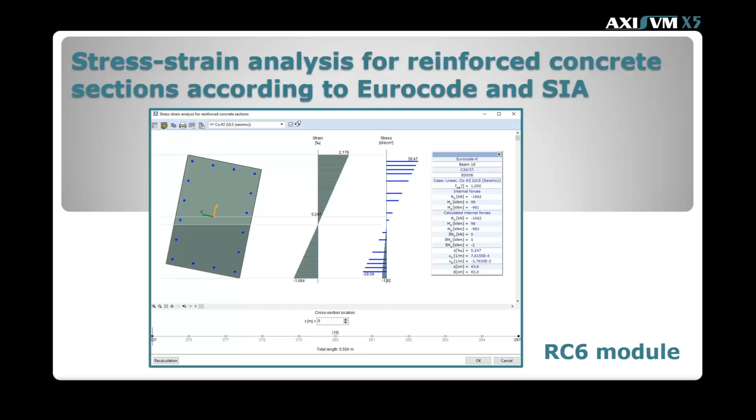It can take into account the applied reinforcement, the nonlinear behavior of the concrete and the rebars, as well as the cracking of concrete. The stress-strain state of the concrete and rebars can be used to verify the structure in various serviceability limit states. The stress ranges can also be calculated with RC6 for fatigue verifications.

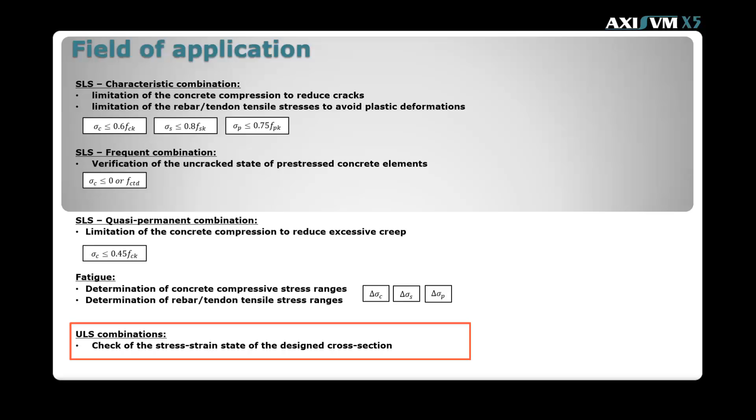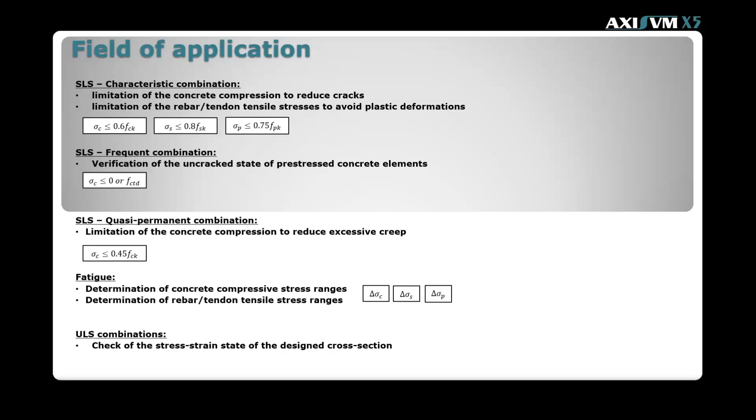Moreover, the module can help to visualize the stress-strain state also in case of ultimate limit state, after the cross-section is designed with the RC2 module. In the next sections, the new features of the RC6 module will be presented through a prefabricated reinforced concrete hull with crane track, using the Eurocode standard.

The one-bay reinforced concrete hull is 20 meter wide, 12 meter high, and 48 meter long. The distance between the main frames is 6 meter. The main beam is a 150 centimeter high pre-stressed T-beam.

The columns have a cross-section of 40 x 40 centimeter and 40 x 80 centimeter, while the dimensions of the rectangular longitudinal beams are 40 x 70 centimeter. The hull is designed with a reinforced concrete crane runway to serve a 10-ton crane. The crane runway girders are also rectangular cross-sections of 40 x 60 cm.

The main beam has a concrete material grade of C40/50, while all other elements are C30/37. The beams are single-span girders. The column bases are clamped.

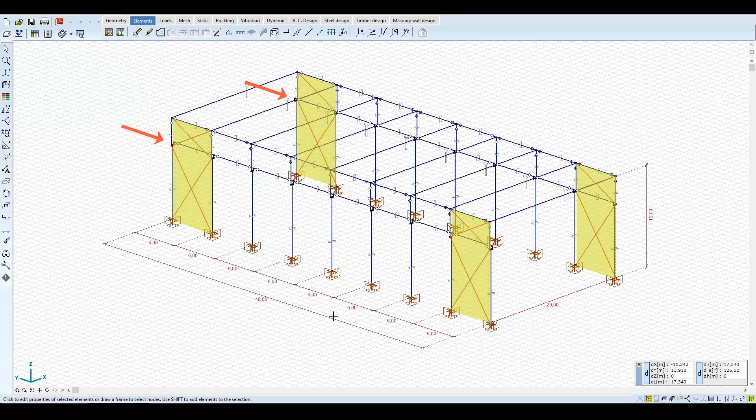Bracing is applied at both the front and rear parts of the hull to transfer the longitudinal wind and crane forces to the fundament. All structural elements are modeled with beam elements except for the bracing, where truss elements are used. The eccentricities are taken into account with rigid links.

Flexural hinges are applied at each end of the beams. In order to be able to apply the pre-stressing properly on the main beam, translational hinges with a small stiffness are used in the global x-axis to avoid force transfer in this direction.

The following load groups and load cases are defined for the analysis and design of the structure. We have permanent loads, such as the weight of the structure, the weight of the wall panels and the roof load. A tensioning load group is defined for the pre-stressing of the main beam, and we have also the typical meteorological loads, the snow load and the wind loads.

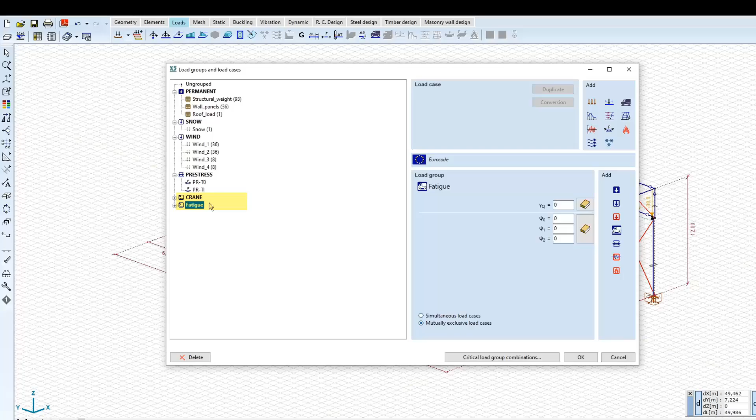Two crane load groups are defined as moving load groups. One is for the ultimate limit state to design the crane runway beam. The other is for the fatigue assessment.

Once we define the load groups and load cases, we have to define the critical load group combinations. In this table, we can choose which load groups can be combined with one another, using the partial and combination factors of each load group, to arrive at the critical results.

In our case, the fatigue load group does not need to be considered for the critical combination. Therefore it can be unchecked.

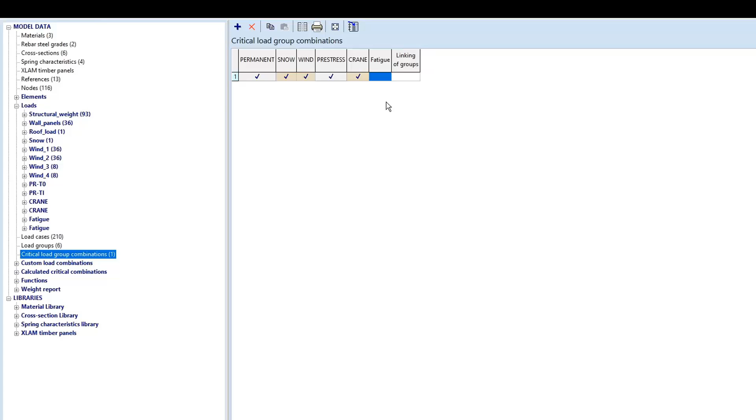In some situations, we need more than one load group for the same action, if it is described with multiple groups of loads. Such case is the crane load itself, where Eurocode, for example, defines 10 loading situations. For the sake of simplicity of this example, we consider only the first load group, which is authoritative for the design of the crane runway beam.

However, the final design should contain all 10 load groups, and in the critical load group combinations table the simultaneous action of them has to be excluded.

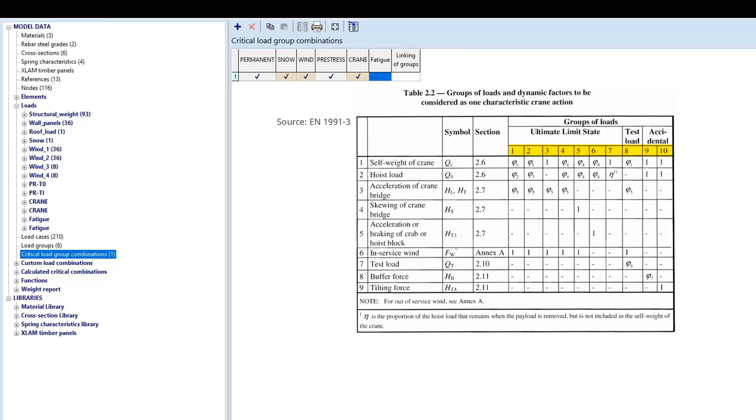Now let's see how we apply the different loads on the structure. The structural weight is calculated automatically by the software. The weight of the wall panels is applied as line loads along the length of the columns.

For the roof load and for the snow load, a load panel is defined to automatically distribute the surface loads onto the main beams. The roof load is 1.0 kN per square meter, while the snow load is also 1.0 kN per square meter.

We can also ask the program to show the load distribution scheme as well as the derived line loads on the main beams. This way we can check if the distribution corresponds to that of our expectations.

At the wind load definition, we chose the traditional way of distributing the loads as line loads onto the columns. As a simplification, only the columns are loaded. Furthermore, the wind pressure and wind suction are indifferent from the wind direction.

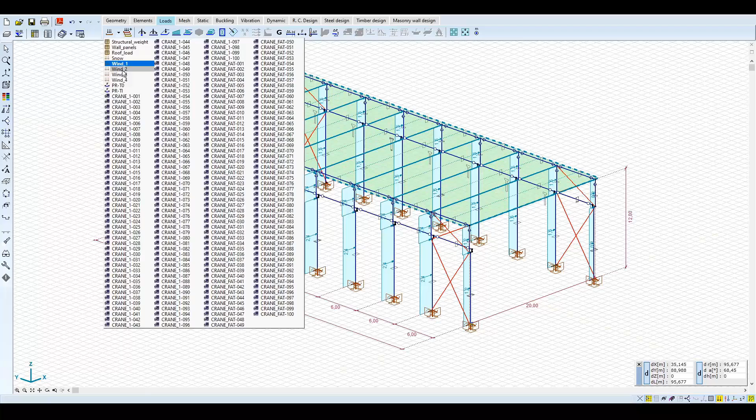All four wind directions are simulated with a wind pressure of 0.4 kN per square meter and a wind suction of 0.25 kN per square meter.

The pre-stressing is modeled only for one beam, which is authoritative in the middle of the hall. The pre-stressing is applied with the help of the PT1 module. This module is designed for post-tensioning applications, but it can help us to define the pre-stressing tendons and to automatically calculate the external forces caused by the pre-stressing.

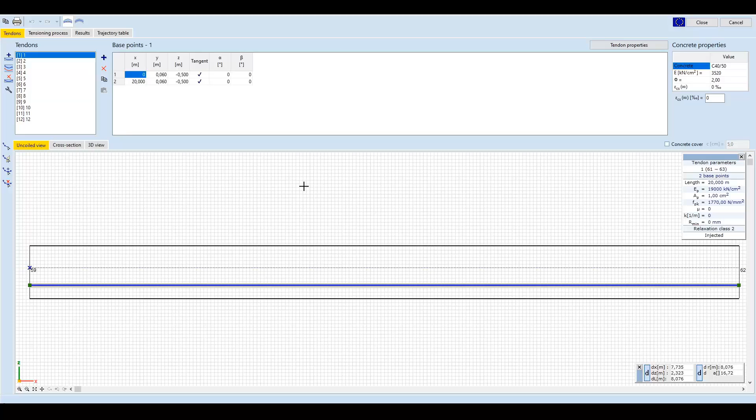In the PT1 module, we can easily define the position of the tendons using the longitudinal or cross-section view in case of the graphical input, or by using the tabulated input option. In this example, we apply 12 pieces of FP100 per 1770 tendons.

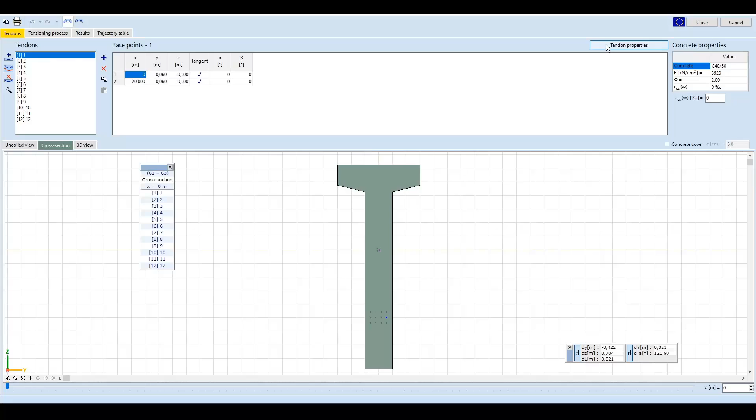In case of pre-stressing, the tension loss at the end of the tensioning process is nearly zero. This behavior can be obtained by setting the relevant tendon properties to 0. At the tensioning process, we leave out the anchoring loss and we apply a 75% tensioning from both sides.

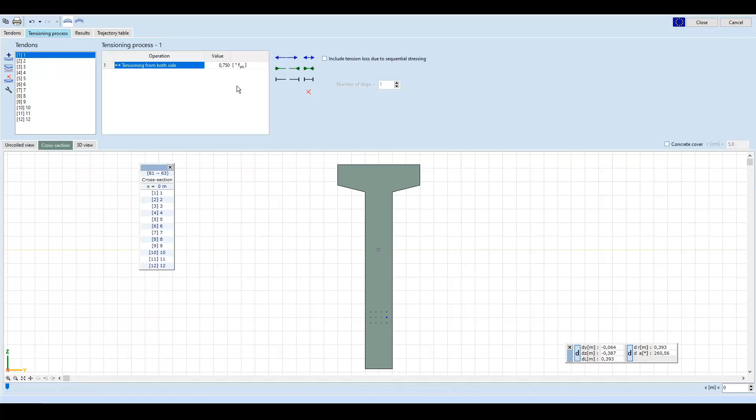We can check the results on the Results tab. The tension force is constant without additional loss along the beam. And as we can see, there is no additional vertical internal force, since the tendon is straight.

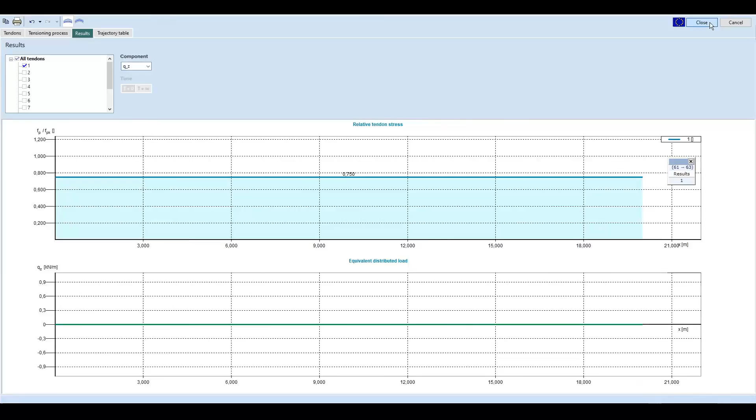If we go back to the model, we can see the external forces at both ends of the beam. The normal force represents the tensioning force at the time of pre-stressing, and the bending moment is caused by the eccentricity of the tendons. The PT1 module calculates the tension loss during the lifetime of the structure, but since this

loss is related to a post-tensioning process, it cannot be used in our example. The loss in pre-tensioning is only estimated and a factor is used to convert the T0 results to the T infinity time step.

Let's move on to the crane load definition. Typically, overhead traveling cranes have a hoisting class of HC3 or HC4 and an S class of S6 or S7 for fatigue verifications.

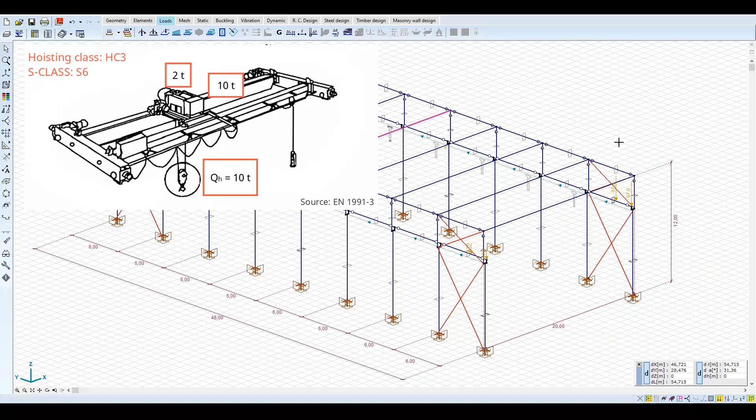In our example, the hoist load is 10 ton, as well as the weight of the crane. And we have a single 2-ton crab. Considering a hoisting class of HC3, and an S class of S6, leads to 195 kN characteristic load on one side, and 85 kN on the other.

The crane has 4 wheels with a distance of 2 meters. The crane load is applied with the help of the moving line load definition. The wheel loads are concentrated loads, but we could apply distributed loads as well.

We can define the type, eccentricity and the longitudinal position of the load. To simplify the example, we will only use vertical loads, but the other simultaneous horizontal Fx and Fy components could be defined as well.

The position of the second wheel is 2 meters. The crane cannot leave the crane runway beam, so we use the crane runway mode. It is sufficient to use a one-way pattern, since the wheel loads are identical on one side.

In the next step, we define a load path by selecting the relevant crane runway beams and also the start and end point of the path.

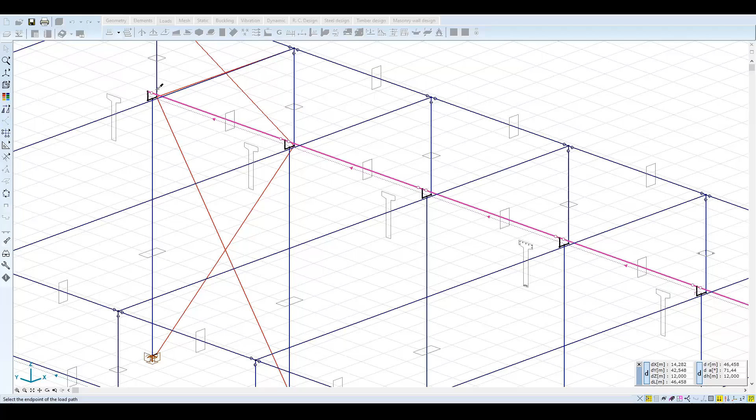We need a smooth load distribution. So we set the number of divisions to 100. The software automatically creates 100 load cases for the crane load in the 100 different positions.

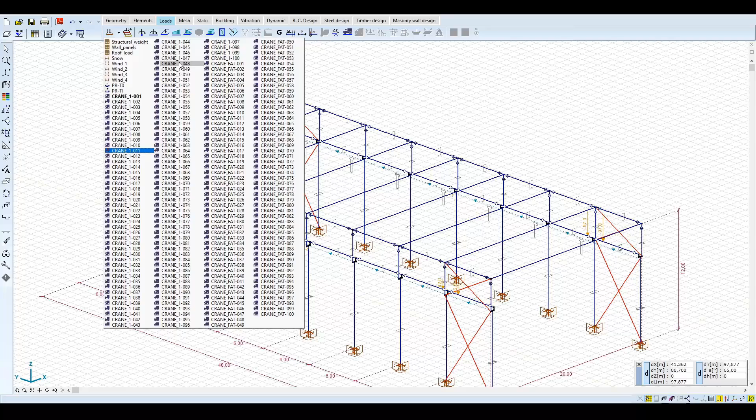For the fatigue verification, a reduced wheel load of 88 kN and 37 kN is used. We define the fatigue crane loads in the same way as we did for the characteristic load.

We can change the parameters of the moving load anytime. For example, the number of divisions. And the software redefines the load cases automatically.

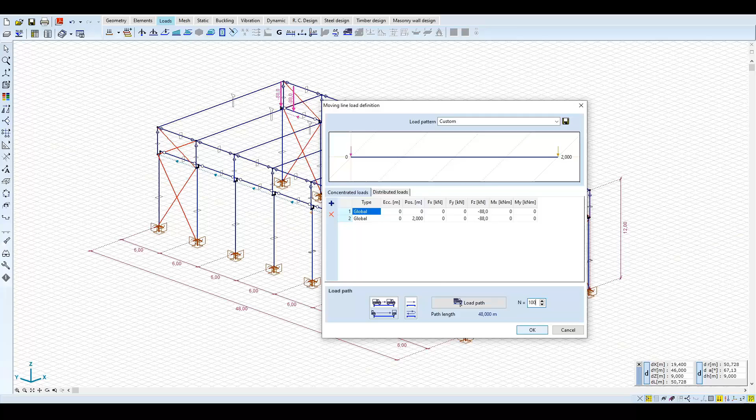In addition to the automatically calculated critical combinations, we can also define custom combinations for various purposes. For example, we would like to check the uncracked state of the main beam in the frequent combination at the time of pre-stressing as well as at the end of the lifetime. The loss in pre-tensioning is estimated to be about 30%, so a factor of 0.7 is used for the T1 time step.

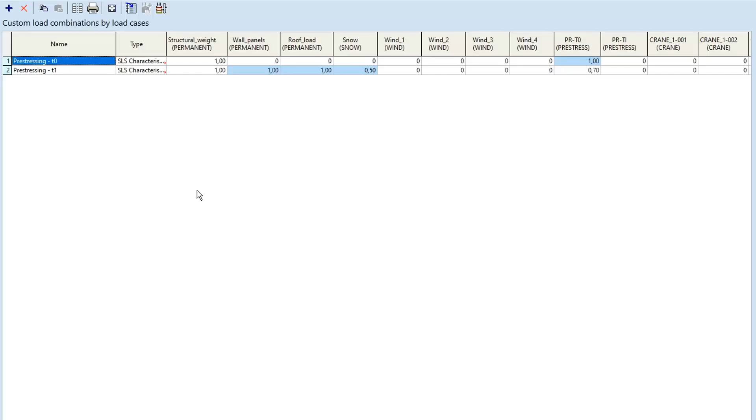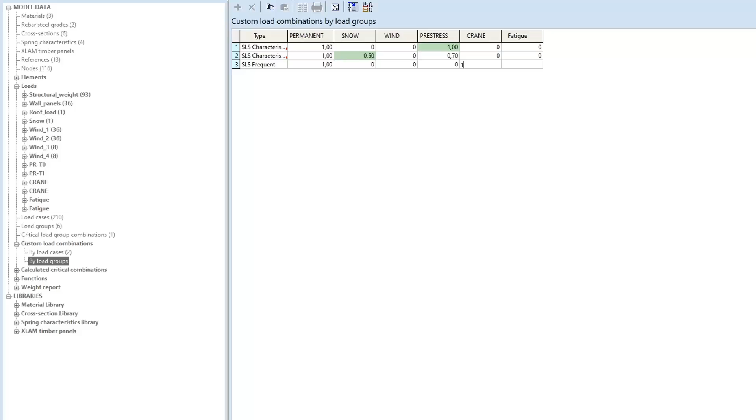The crane fatigue load is a unique load group. For fatigue verifications, we have to combine the moving load with the permanent loads. This can be done in the custom load combinations by load groups table. It is sufficient to define which load groups are combined with one another, and the software generates all the possible unique load combinations, so we do not have to do it by hand.

After the definition of the load combinations, we can start the static calculation.

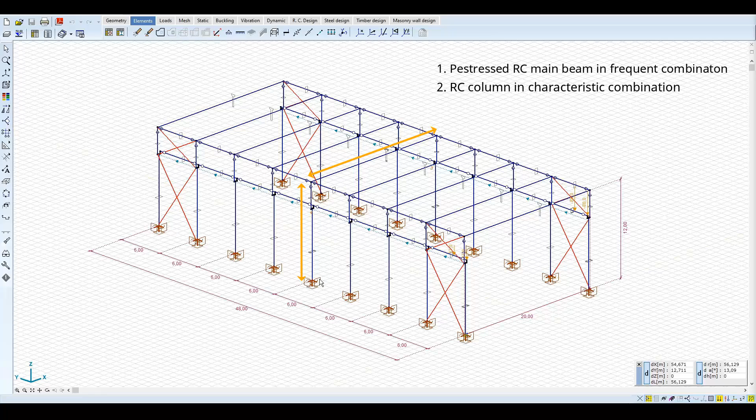To present the features and capabilities of the new RC6 module, three structural elements will be checked: the pre-stressed main beam in the frequent combination to check the uncracked state, the column in the characteristic combination to avoid excessive cracking of the concrete and plastic deformation of the rebars, and the crane runway beam, where we will design and check the beam for fatigue.

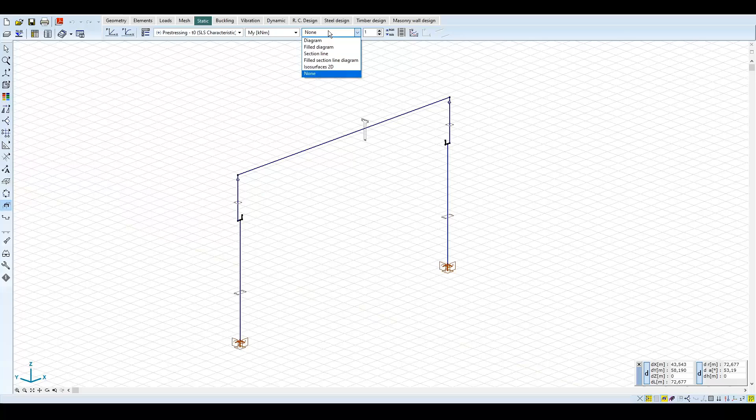First, let's see the main beam. If we choose the predefined load combinations in T0 and T1, we can see that the tension from the bending moment is authoritative at the beam end in T0 and in the middle in T1. Now we check the stress-strain state of the beam.

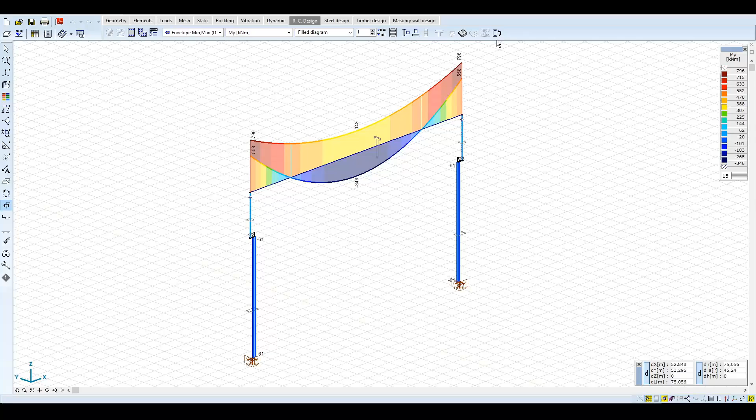The RC6 icon is located on the Reinforced Concrete Design tab, at the right end of the icon bar. We select the main beam to start the analysis. It is important that the analyzed structural element has to have a column or beam reinforcement defined with the RC2 module, otherwise the analysis cannot be started.

In the main window of the module, the first thing we see is the cross-section with the compression zone, the strain diagram, as well as the stresses in the concrete and in the rebars. On the right side, the module provides information about the analysis parameters and about the main results, such as the actual and calculated internal forces, the calculated strain in the center of gravity, the curvatures about the local Y and Z axes, and also the depth of the compression zone and the lever arm of the tension force from the external compression point.

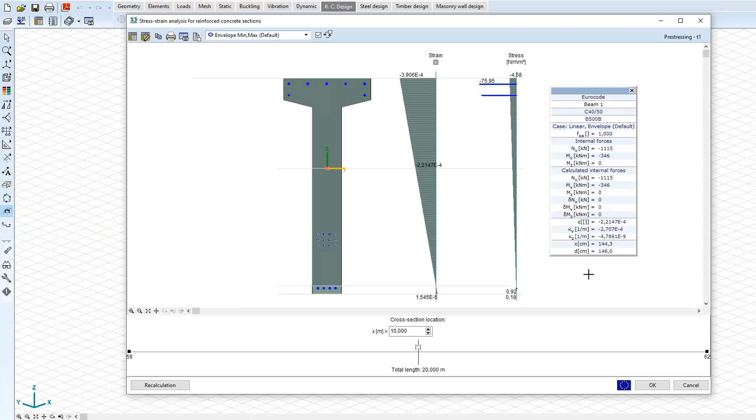Before checking the results, we have to set the analysis parameters. We can choose from the standard material grades, but they may differ from those specified as reinforcement parameters. We can select which internal forces are to be considered and we can modify the seismic coefficient as well.

The software provides four material models according to Eurocode: bilinear, parabolic, nonlinear, and custom. The latter allows us to define tensile strength, therefore it is appropriate for checking the uncracked state of the concrete.

The program automatically defines the standard stress-strain functions based on material grades. The rebar behavior is modeled by a bilinear material model. The last option, filtering, defines which component should be used to select the critical solution in case of envelope or critical combinations.

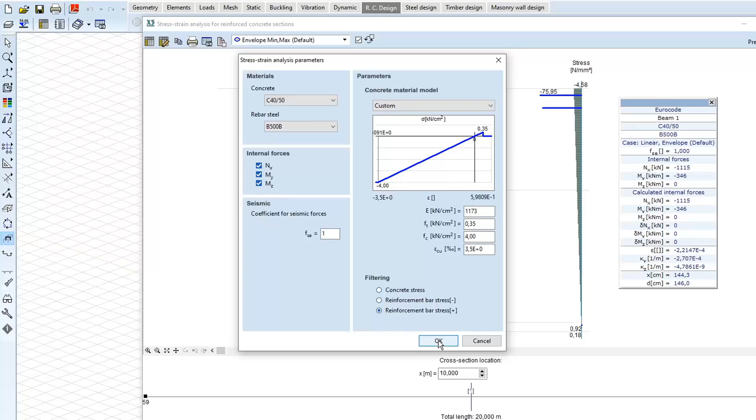In the drop-down menu, we can select the source of internal forces, which can be taken from any load case, load combination, envelope, or internal step of a nonlinear or dynamic analysis. First, we select the combination for the pre-stressing in the T0 time step.

The software shows the middle cross-section of the beam by default. The pre-stressing is effective, the whole cross-section is under compression, but the stresses never reach the limiting values.

We know that at the time of pre-stressing, the end section of the beam may be critical. We can change the position for analysis by entering the required X coordinate.

The upper external fiber of the concrete is under tension, but it does not reach the limiting value of 3.5 MPa for the C40/50 material grade. Therefore, the beam remains uncracked. Other values are also under the standard limits.

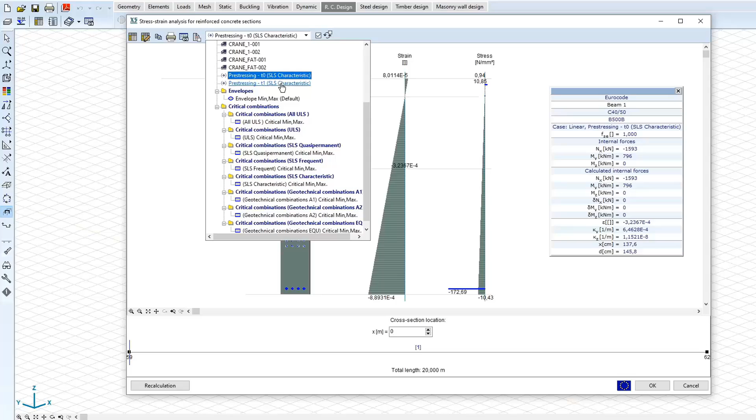Now we check the stress state of the middle cross-section at the end of the design life T1. The lower concrete fiber here is also under tension, but again, all stresses are lower than the limiting value. Thus the uncracked state can be verified.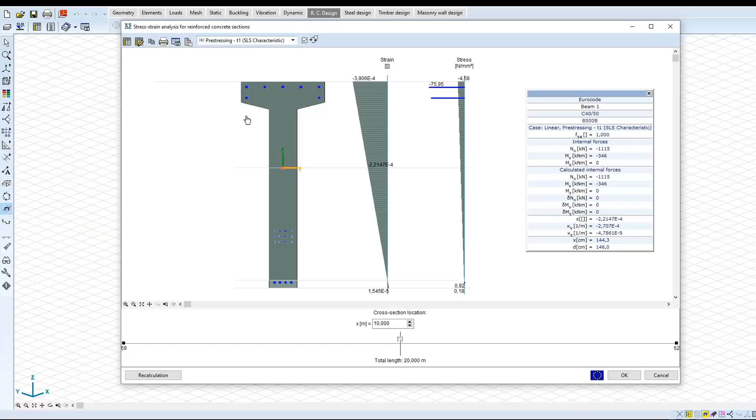Click on the table icon to display the results in a tabular form. Detailed results are provided for all analyzed internal force combinations, if an envelope or combination of load groups is selected. The tables as well as the result diagram can be printed directly or copied and saved for documentation.

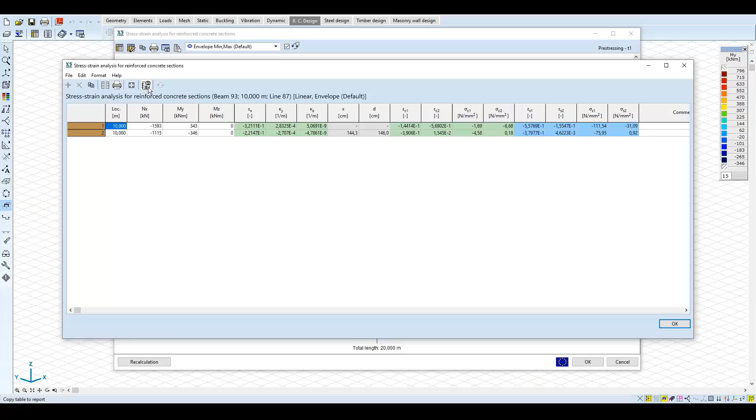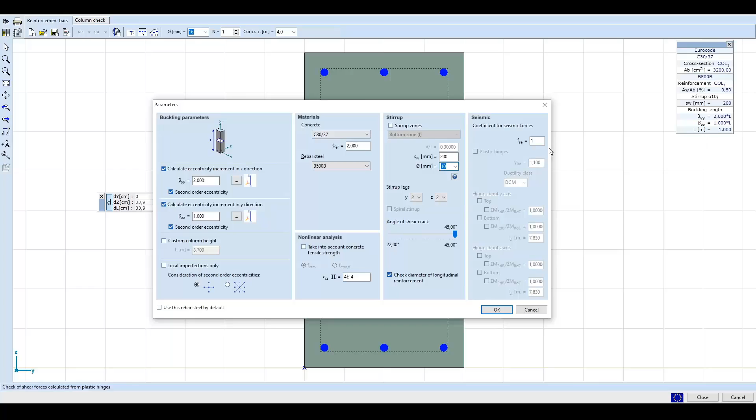The column is designed with the RC2 module, where the reinforcement parameters and reinforcement are also defined. The utilization is about 70%, meaning the column has additional reserve for the not-considered crane horizontal forces.

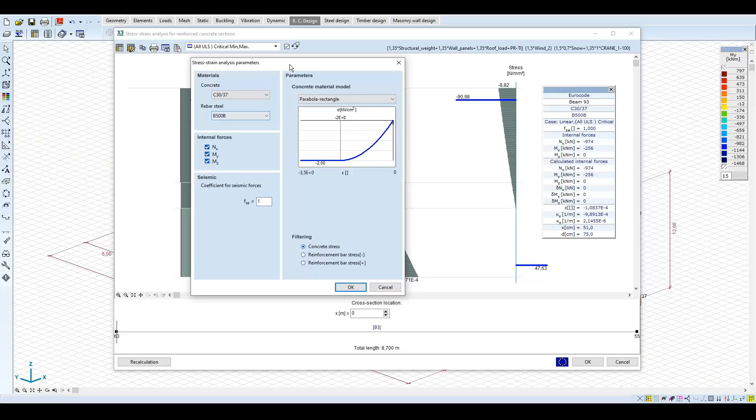Now let us see the stress-strain state of the cross-section at the foot. First, we set the analysis parameters and then select the characteristic load combination. Now we can check if the concrete compression and rebar tension is acceptable.

All values are under the limit. Therefore, the requirement of this SLS is fulfilled.

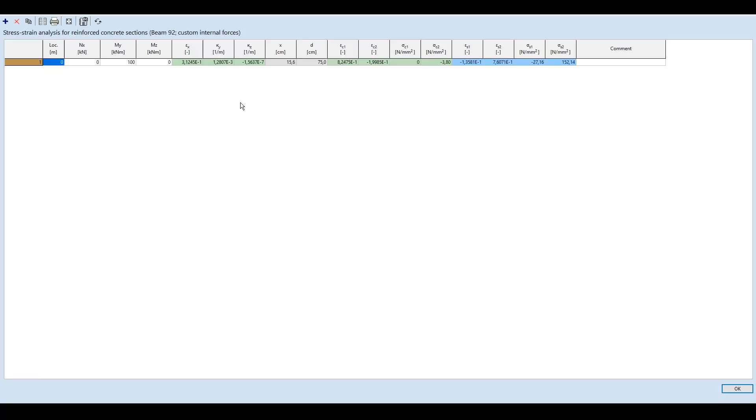We can also define custom internal forces. An error message appears if the normal force biaxial bending point is outside the load-bearing surface. Otherwise we can check the tabulated results.

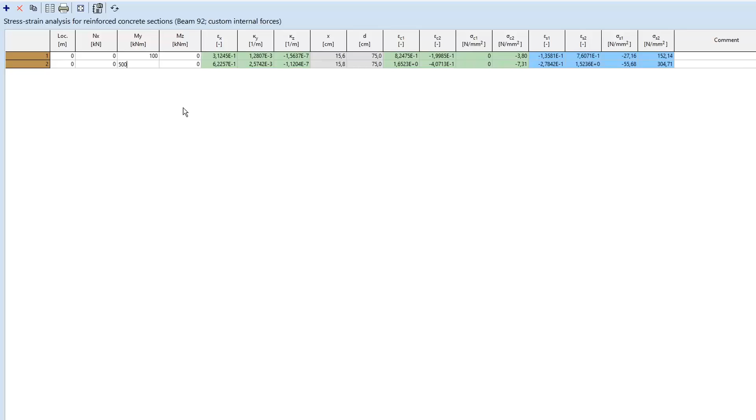Let us check the other column at the front, which can obtain biaxial bending due to direct wind loads.

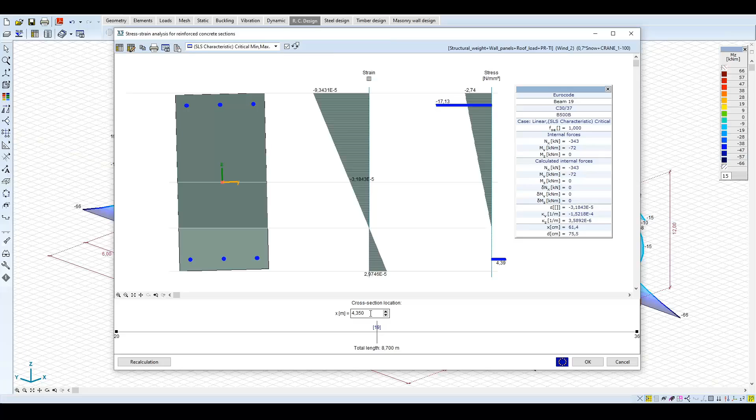Because of the biaxial bending, the neutral axis is now inclined. We can rotate the view parallel to the cross-section or to the neutral axis for a better overview. The stresses are again acceptable.

Actually, this check may be critical rather for taller buildings. Nonetheless, it has been shown that this check now requires only a couple of minutes with the new RC6 module.

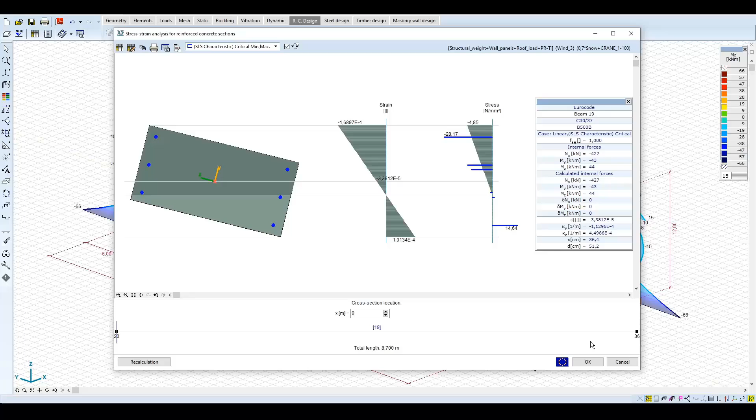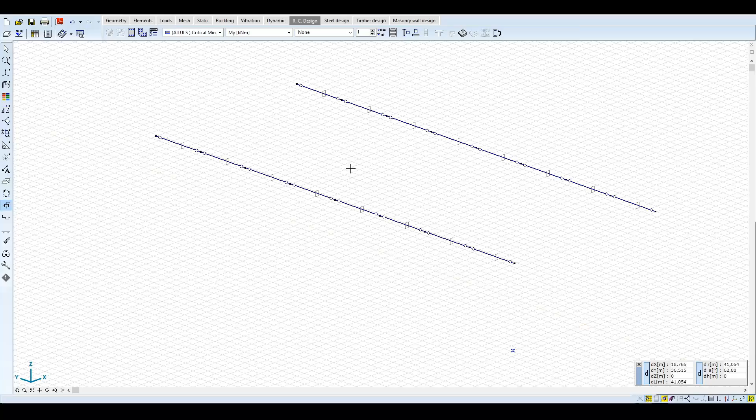In the crane runway example, the first step is to observe the authoritative internal forces and design the beam with the RC2 module in the ultimate limit state.

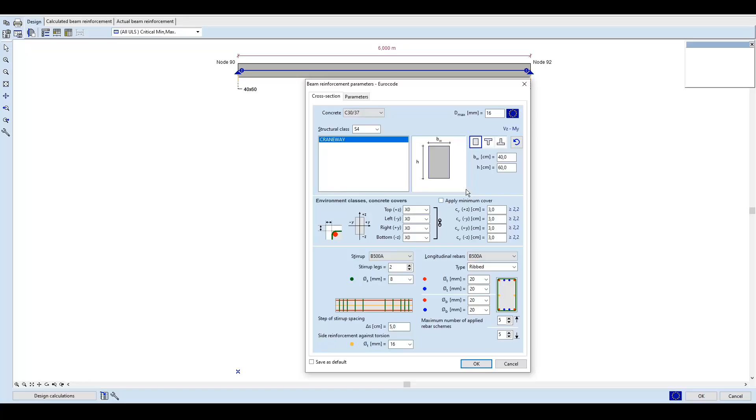We set the reinforcement parameters. We use 20 mm rebars, 8 mm stirrups and a 3 cm concrete cover.

At the Actual Beam Reinforcement tab, we can automatically apply the program-calculated reinforcement to fulfill the requirements of the ULS. That means 5 rebars at the bottom and 2 rebars at the top.

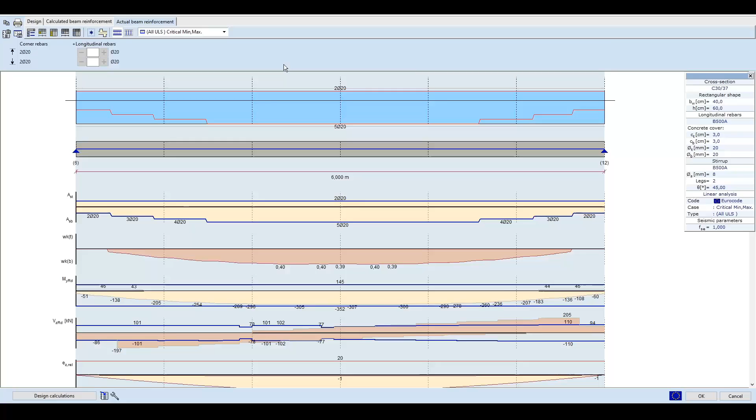For simplicity, we apply the same reinforcement along the whole length. The applied reinforcement appears in the schematic cross-section shape.

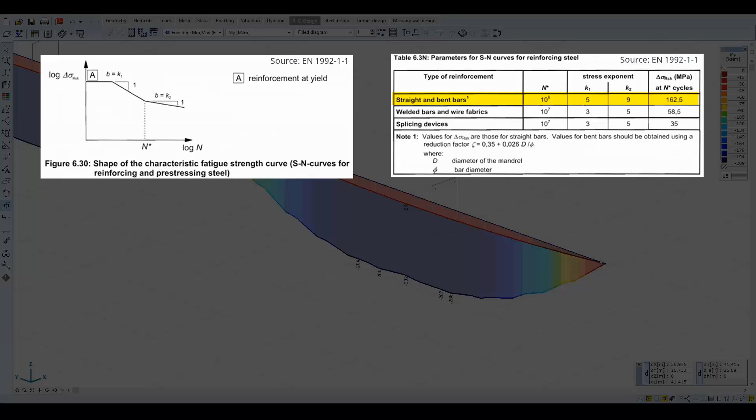Let's see if this reinforcement is sufficient for the fatigue verification. In order to verify the rebars, both the fatigue strength and the stress ranges have to be transformed to the 2 million cycle level. The design fatigue strength of the rebar at 2 million cycles is 123 MPa.

The damage equivalent factor for S6 class cranes, considering a slope factor of 5 of the SN curve, is 0.871.

Rearranging the equation provided by Eurocode, we obtain a maximal allowable stress range of 141 MPa. The stress range is calculated as the difference between the stresses caused by the permanent loads and by the fatigue load group.

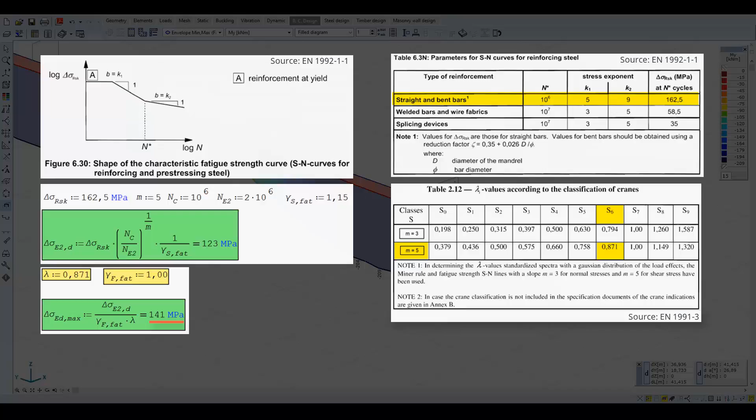If we click on the beam and select the fatigue combination, we can determine the position of the maximal bending moment. This is our critical cross-section for the fatigue verification.

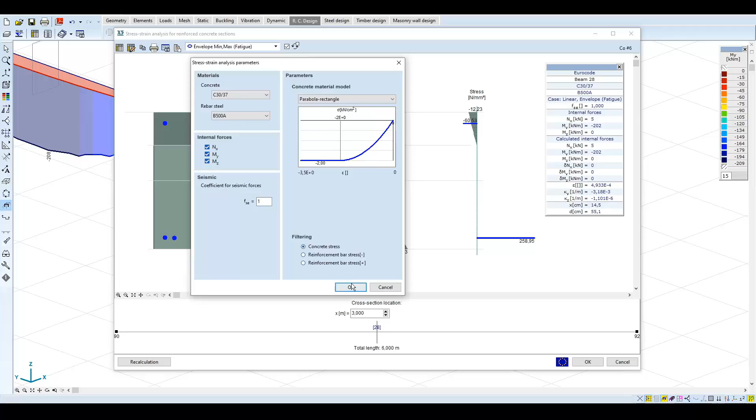In the RC6 module, we set the analysis parameters, then read out the maximal stress in the rebars. We do the same for the permanent loads, which is here only the structural weight.

The calculated stress range is therefore 267 minus 34, equals 233 MPa, which is way more than our limit of 141 MPa.

That means we have to increase the number of rebars, even if they are sufficient in the ULS. Let's go back and apply 4 more rebars and repeat the fatigue check.

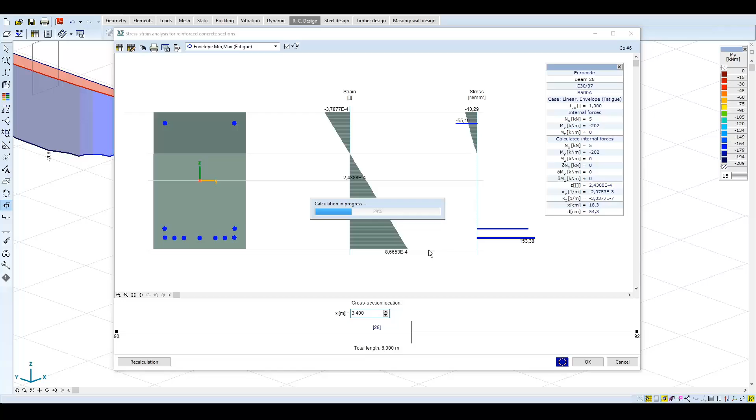The stress range is 158 minus 20, equals 138 MPa, with which the fatigue verification is fulfilled.

In this example, the fatigue requirement is stricter than that of the ULS, and that leads to a less economical design.

In this case, a pre-stressed beam would be a more favorable alternative, since it reduces the tension in the rebars and also increases the fatigue strength of the concrete.

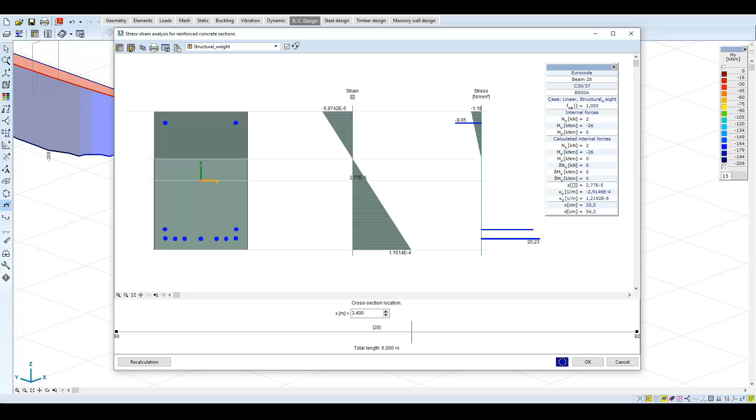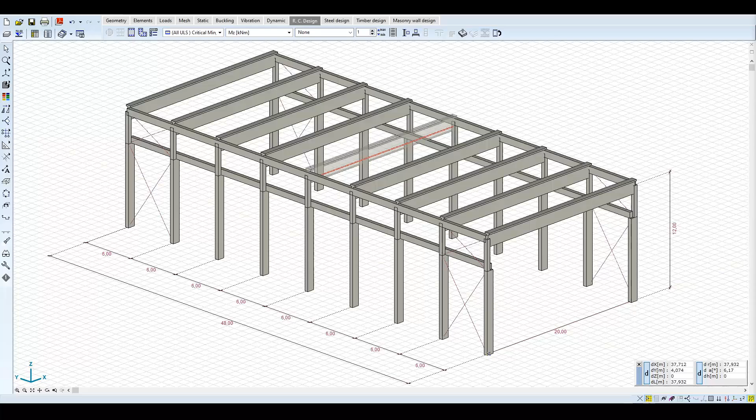In this tutorial, the new RC6 module is presented through an RC Hall example. It has been shown how the module can accelerate both the preliminary and final design process in order to arrive at economical solutions.

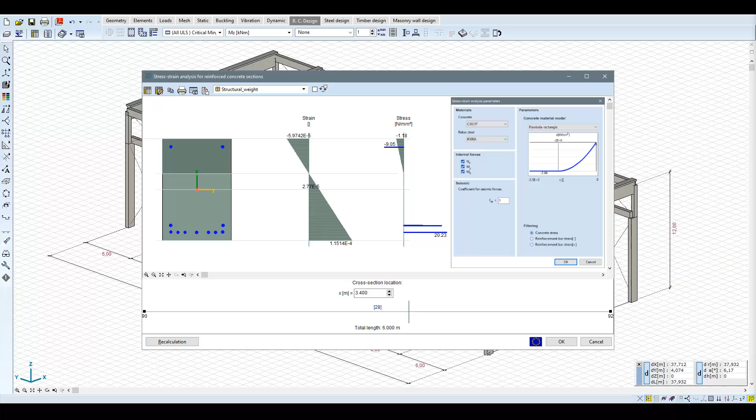Since the module is integrated into the main software, the stress-strain state of reinforced concrete beam elements can be assessed in a couple of minutes for all the relevant load cases and load combinations.

The results of the analysis can be used for various serviceability limit state verifications as well as for the fatigue evaluation of RC cross-sections. With AXISVM software there is no limit you can make.